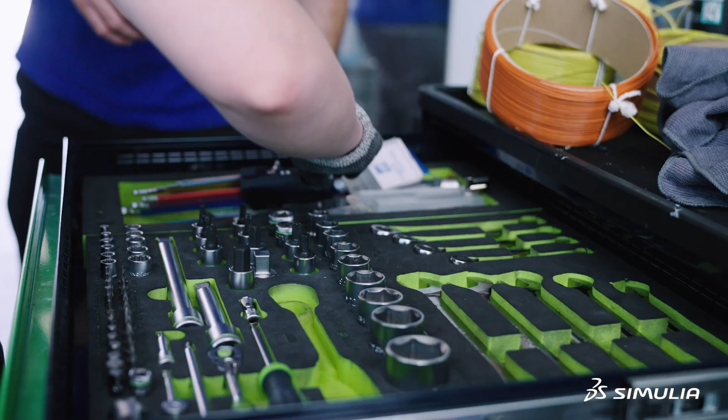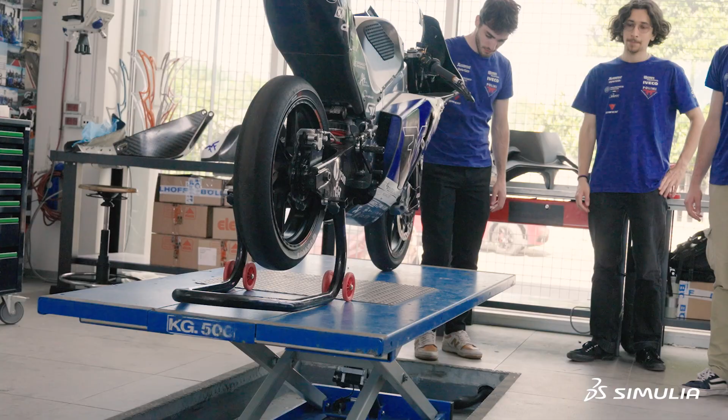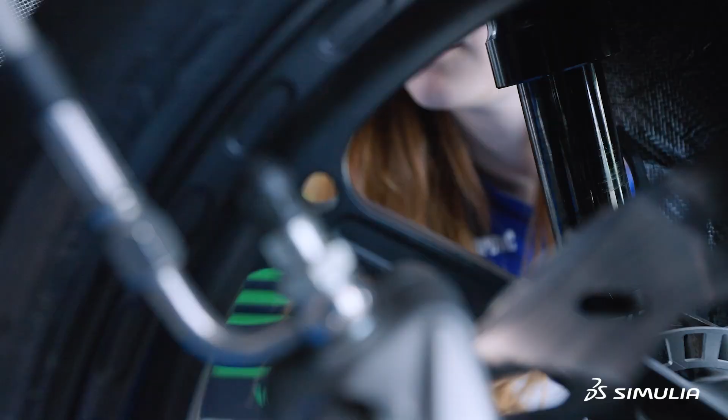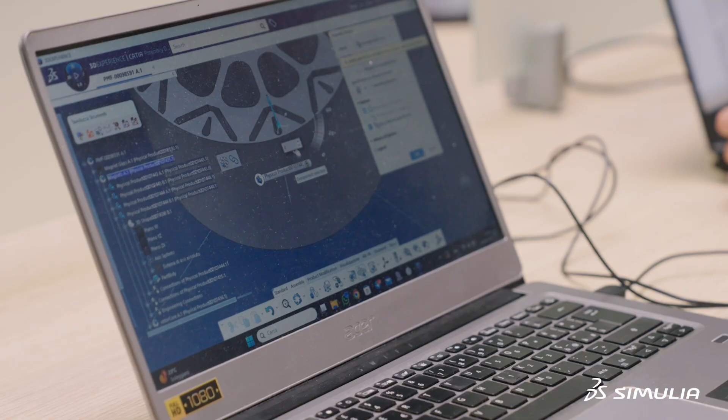We start with mechanical engineers and we end with designers and architects. We don't start from scratch. We make treasure of past experiences, but we try to start over and build new prototypes with improvements. We have to make sure our prototype is fast and also reliable. Given the structure of our competition and our limited budget, simulations are greatly important to us. We need to simulate every single piece of the motorcycle in order to do our best.

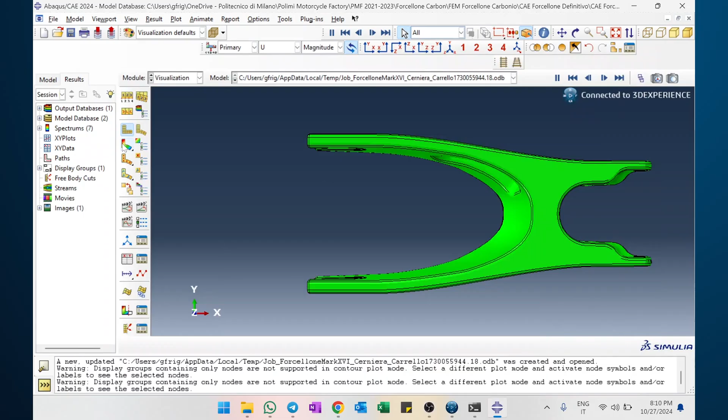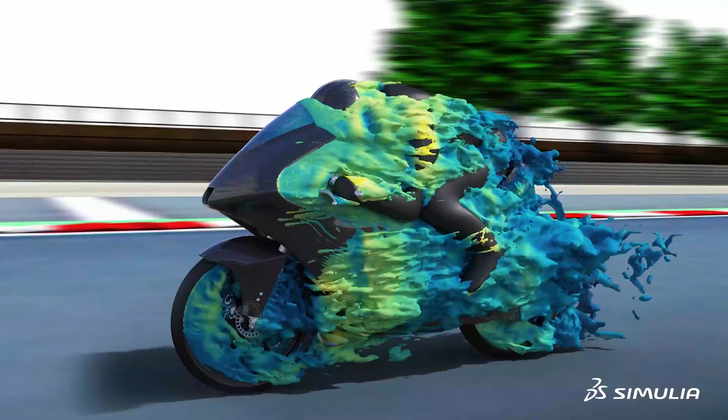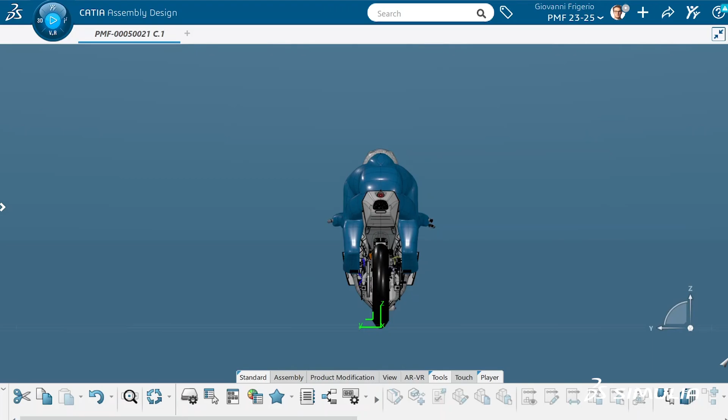With the electromagnetism side, we adopted the 3DEXPERIENCE platform because we can work on the same project together. It allows all the team members to see the development of our prototypes. Everybody can work in their own environment, but there is also a shared environment where everybody can see the development of the process. The use of different SIMULIA tools is quite intuitive.

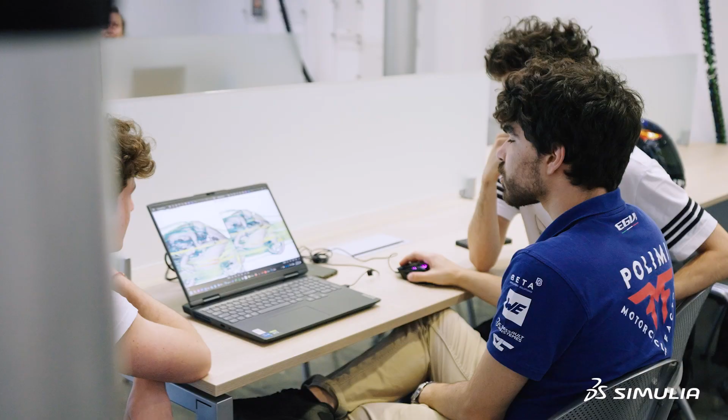It helps us work in an easy way. We can see the modifications made by a user and exchange ideas by simply modifying, for example, the drawings or the models. SIMULIA provides us with a great level of confidence. Together with the 3D Experience platform, we want to win the competition.

I love the 3D Experience platform because it allows us to take the next level year after year and improve the performance of our prototypes. I love the 3D Experience platform because it helps us reach our dreams. I love the 3D Experience platform because it is easy and it is similar to our team.